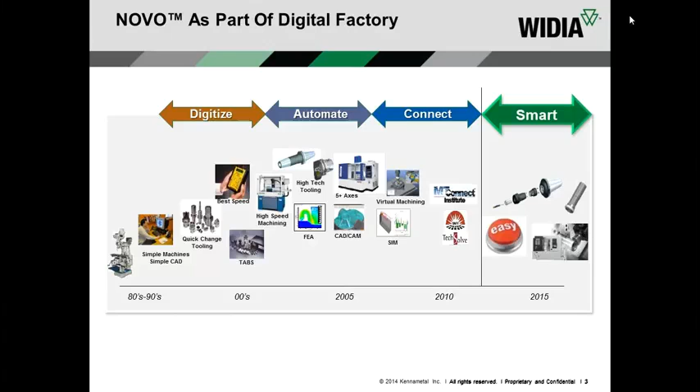So if you think about where we are today, you have a lot of complicated CAM programs, tool management systems, verification software up on the left, coming together to talk to very expensive digital machine tools, which are also being enabled by a movement called MTConnect, which will allow these machines to talk together. On the bottom left, you have a bunch of digital data around all the products and consumables we use. It's coming in through the web, coming in through the cloud.

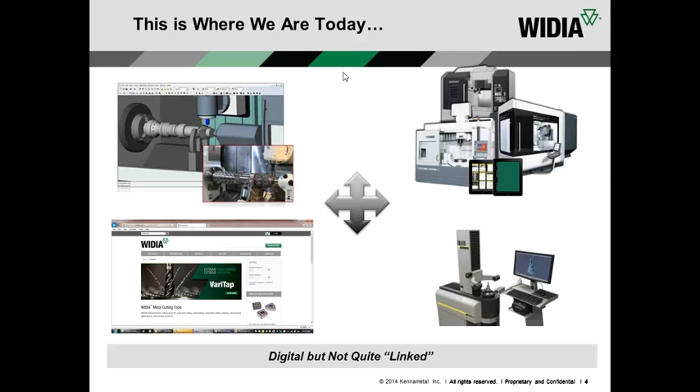And finally, on the bottom right, a bunch of other related equipment. So we have a very digital environment that we operate in, in our personal lives and in our shops, but it's not quite linked. So our vision with Novo was digitizing our knowledge and data around our products to enable productivity in what we call the other 97%. You might have heard the study.

Normal studies will say that around 3% of the standard cost of goods sold for a machined component is tooling. All of the other costs are in other areas: labor, machinery, overhead. And the opportunity by digitally connecting all this stuff is to cut down on non-value added work. So instead of optimizing a machining process spindle by spindle, feature by feature, and then going back and trying to get it back through the system, what if we brought that knowledge and data up front in a way that it could flow through the art-to-part process?

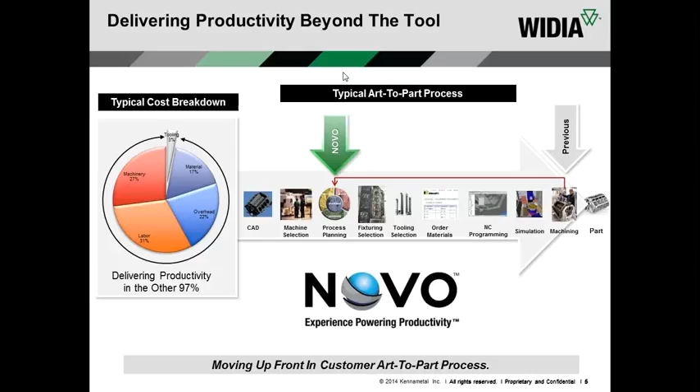Wouldn't this be much smarter? Wouldn't this eliminate a lot of non-value added work, looking through catalogs, typing data, and manipulating models? This is all really a necessary evil. And we think we're on a very positive path towards doing this. We have really been able to solve a lot of problems for people in the process planning area.

They know the CAD/CAM, they need access to our data and models, but they also need it to work very easily and very simply with the systems that they use. And all of the people around the machining operations, our distributors, our application engineers, they also are doing a lot of this process planning and collaborating.

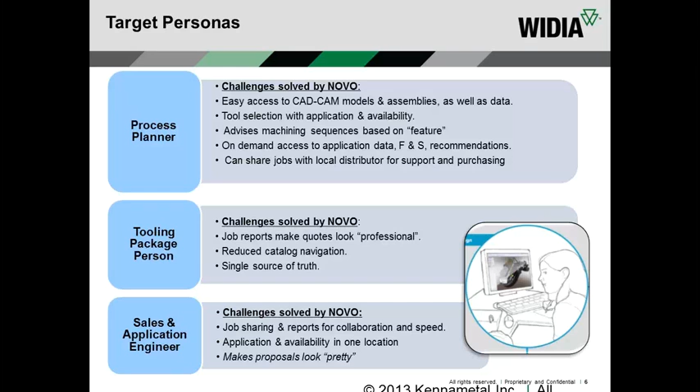The process planning is a very collaborative process in the machine shop: purchasing, production planning, CAD/CAM. So that's by bringing the data together in a way that can really be manipulated and brought in the right way to the right place at the right time to speed this process up. I can show you just one case example of what we have accomplished.

You know, the traditional way of selecting tools, our team, in fact, this is a team of process planners within WIDIA who, you know, we're basically a tooling company. They told us this is a day in our life. Someone puts this process plan in and says, hey, pick me all the tools and machining strategies to do this process. They told me that on average, this would typically take a 4-man team about 2 days to do in the past.

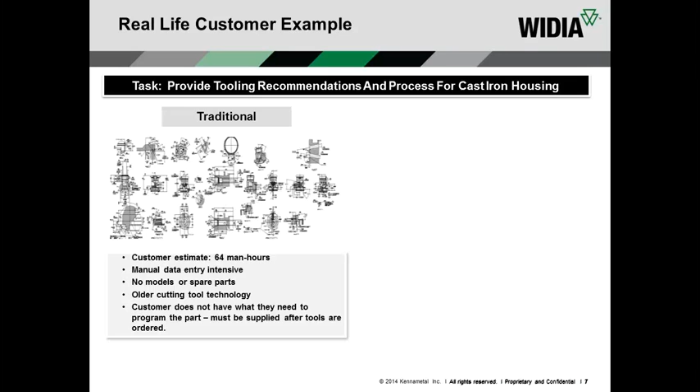You know, you got these 5,000-page catalogs. You got to look for everything that fits together. You basically got to reverse engineer the component, and in the end, you still wouldn't have all of what you need to program the part, and you'd probably use a lot of old knowledge because when you have all this data to go through, you tend to revert to what we call tribal knowledge.

With the new PC and tablet application, a 4-man team did this in an afternoon. It was 103 tooling assemblies on this particular component. They had all the optimal feed and speed information, the latest technology, because Novo is coming live from WIDIA's PLM system. So if we put a new product in today, it's in there today.

And most importantly, they had all the assemblies, all the models, and all the data ready to program their part. So this is just one example of a 75% time saving just in the area of selecting, getting the models and data, and getting prepared to program your part. So this is what the future of digital manufacturing holds.

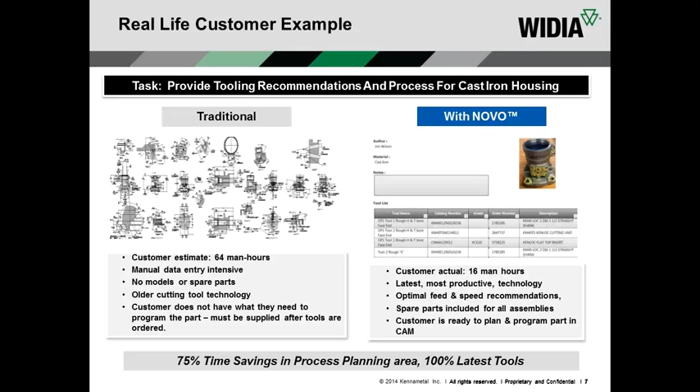So our vision really is to connect with all of these areas within the shop which required tooling, data, and knowledge. And as you can see, we've launched a free tablet and PC application, but our real vision is to get this data and knowledge into shop systems.

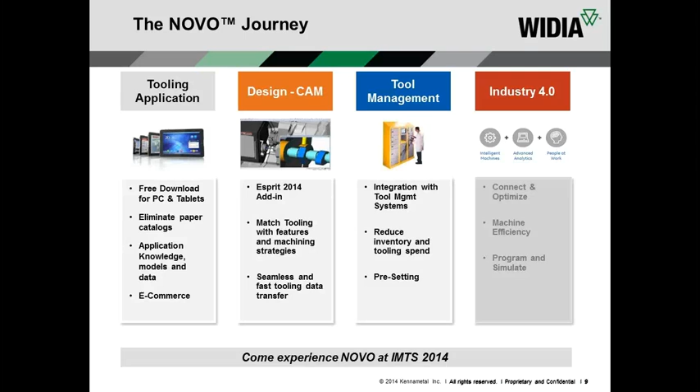And if you were at IMTS, you saw we had already integrated systems with Vericut, Esprit CAM, tooling, Zoller tool management. So really delivering the knowledge and data in the way that people want to use it in a very easy format. And our vision really is to drive all the way to Industry 4.0 for the machining processes. So I hope you enjoyed a little background on the program itself.

Sorry, it took just about 7 or 8 minutes there. What I would like to do now is go into a 10 to 15-minute demonstration of the PC and tablet application. So as you can see when you log into the PC and tablet application, it knows who I am. It knows that this is Chris Merlin.

And this is because one of the unique things about this solution is it allows you to use a free cloud account. So it's just a name and an email address, and not too intrusive. And what this really does is it gives me access to what we call job management. So people in process planning, you know, they're basically programming jobs and organizing packages of data around jobs.

And if you look here, this has got all of the jobs that I've done in the past stored in a nice, easy way. So if I create a job at home and I log in on my PC at work, I've got my data there. So it's very portable, very good for collaboration. And process planning areas are working on the same job, so they can copy a job as a template. They can share a job with their counterpart. It'll show up in their job list. So this is a really nice feature of this particular tool.

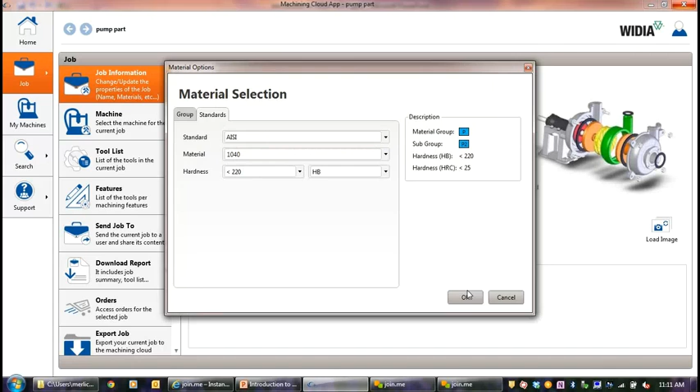So if I go into AISI, I start to type in 1040, it's going to tell you that this is under WIDIA's P2 machinability group. So already it's saving me time because as I set this at the job level, now it's going to work only within the tools which are optimal for this particular material. So now I have the material set.

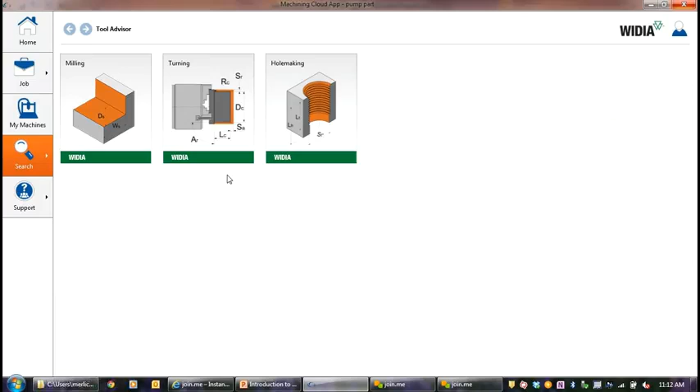I put in a little picture of my component here of what I want to machine, which is the outside housing here. I'm going to work on these holes here on the outside of the housing. So if I go into what we call a tool advisor, it's starting to look a lot like a CAD/CAM software. So I'm going to pick a hole making operation.

It's got lots of nice, easy to use templates. This happens to be a simple through hole. And you see it's got the option here for a machine. I'm going to go into that a little bit later, but you can define machines so that it would restrict some of your selections, for milling, for example, based on the capability of your machine.

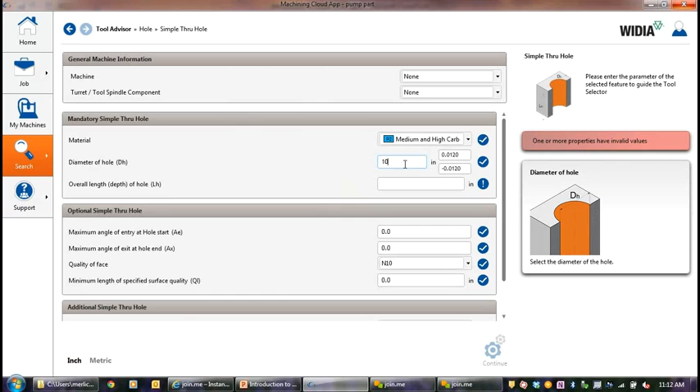In this case, I'm going to go into a hole that I have that's a 10 millimeter hole. So I can work in inch or metric. I'm going to do a 10 millimeter hole, about 50 millimeters deep, and I'm going to tell it that there's about a 60-degree angle on the face. So it's got 3 required pieces of information, one of which is already filled out at the job level, and then a lot of other optional information that I can add to refine its searching or its output.

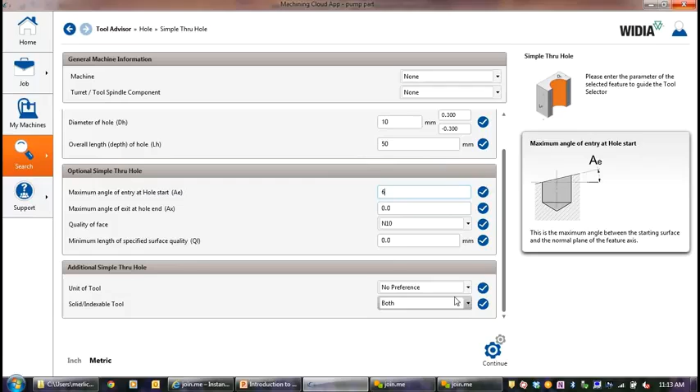So I could ask it for inch or metric tools. I can ask it for solid or indexable tools. In this case, I'm going to run it wide open and find what the best solution is. So when I hit continue here, it's cranking through. What we've done is we've matched all of WIDIA's tools to machining strategies. This is very critical because if you work in a process planning area, you go from component to feature to strategy. And your strategy is often dictated by what you're comfortable with or what works best on your machine. So we've connected all of the WIDIA tools to machining strategies.

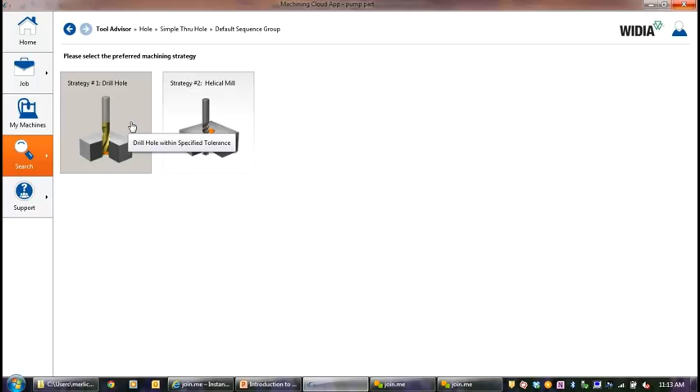So that's pretty cool. And actually, most people will drill this hole. But it did tell me that if I didn't have a drill in stock, it is possible to helical mill this hole. So it allows me to pick the strategy I'm comfortable with, and it may teach me about a strategy I haven't even thought about. I'm going to pick the traditional hole drilling strategy. And now it's cranking through 40,000 standard WIDIA tools based on the parameters I've given it to not only pick a tool, but actually a tooling sequence.

I'm not sure what happened to my tab there. As you can see here, it's found a tool, which is great for a 10 millimeter hole, and because it's 5 times D, it's picked the Top Drill S for this particular application, which is our most productive solution for steel.

Now, it also allows me to view alternate choices. If I'm not comfortable with that particular tool, I can also look for other tools that I might have in my stock. We've also got a connection to our toolbox unit, which would show tools that are in my toolbox unit. So in this case, I've found the tool that's best for me. It's this TDS 202, and now I'm going to add it to my job. Once I've added it to my job, it's saved in there, and now I can do a couple things.

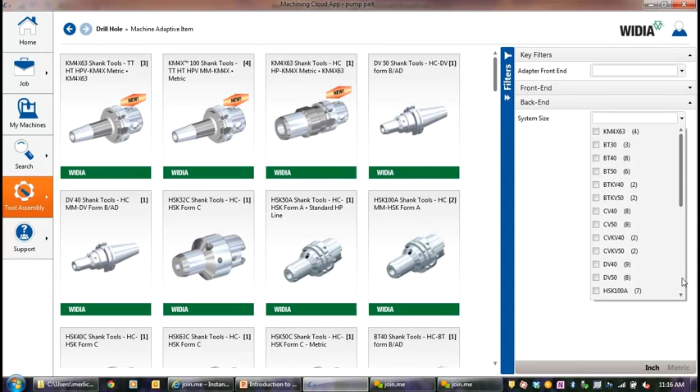It won't match a hydraulic chuck up with a Weldon shank, for example. So I'm going to pick a KM adapter here, I'm going to add it to my tool assembly. And now you're going to notice one of the most important things with Novo. So if you're in process planning or you're working with CAD/CAM, all of this is basically a necessary evil. What you really want is the models and data to program this part.

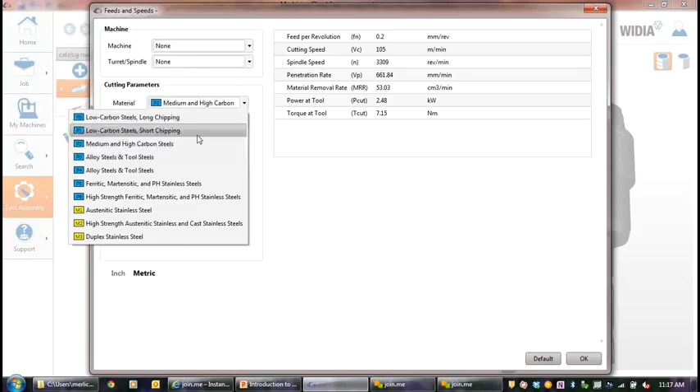So as you can see, it's building live the 3D assembly. I can download this into common file formats. Basically, STEP usually works with Vericut or most CAM systems. I can also do the light simulation model. And I can go in and check the feeds and speeds very dynamically. So if I click on here, I can change the material. I'm going to stay with P2. I can change the starting speed, the starting feed, and it's going to adjust dynamically my torque and power requirements.

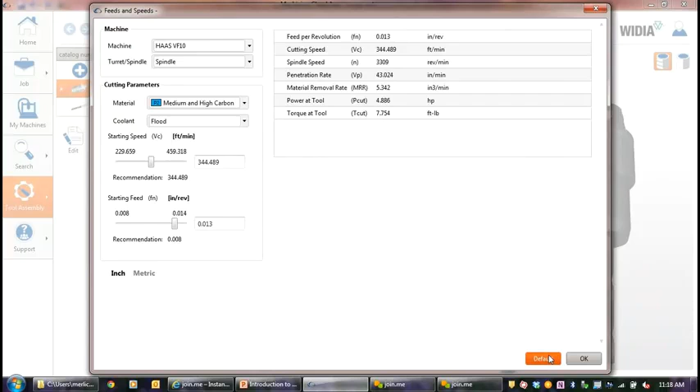So it'll also give me a warning if I've selected a machine. If I've selected a machine in here, and it happens to be a milling cutter, it'll tell me if I've exceeded the capability of that particular machine. It also has a default button. So if you get in here and play with it, you can go back. So now you can see I have my model. I have my feeds and speeds. I can download this. I'm ready to program my part.

The other thing that Novo's done, by organizing this all in a job, I don't have to download just one model at a time, which is very time consuming, or put them together. It's assembled all my models, and I can export this whole model in a format for import into these systems. So if you've ever set a tool up in Vericut or Esprit or Tool Management, you know this could take up to 2 or 3 hours to set these tool assemblies up. With Novo, I can actually, with a click of a button, send 4 or 5 tools into my system, and I'm ready to go. So that's all about how the advisor and the tools and the models work.

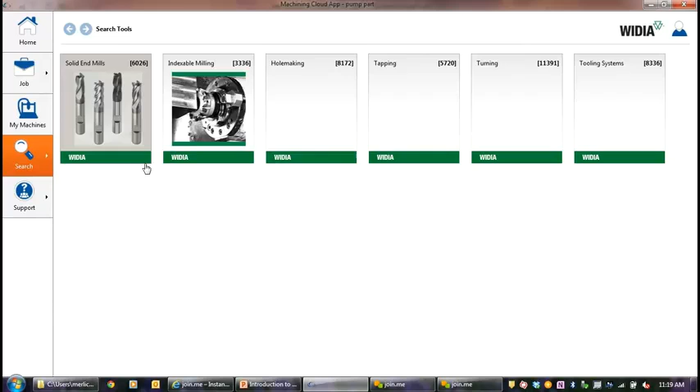I'm also going to show you our search by product family. So this particular solution is like our catalog on steroids. It's electronic. Again, I'll go into milling, for example. But what's really great about this particular solution, I'm not a milling guy. I'm an old holemaking guy. I might want to search for a mill that can do face milling, pocket milling, and helical milling. Okay, so I've done the face milling, pocket milling, and helical milling, and now I'm going to go into a diameter of, let's say, 1 inch cutter here.

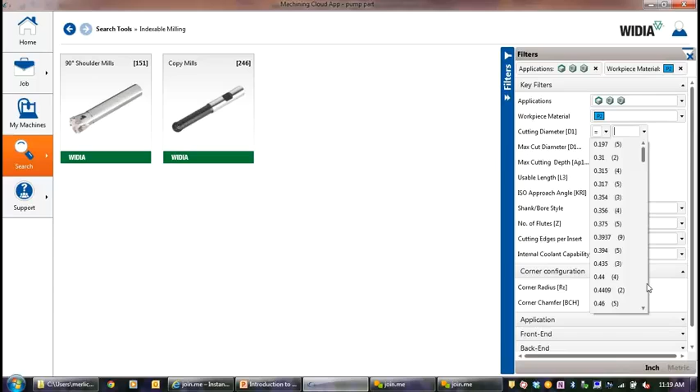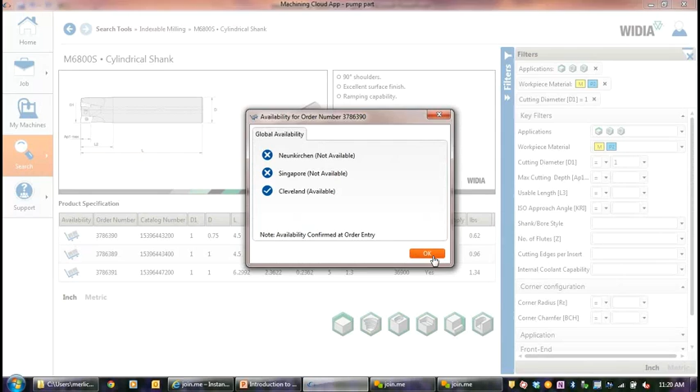So now with just 3 clicks, I've basically found all of the milling cutters within the WIDIA portfolio which will work for this application in P2. I can also say, you know what, I know I want it to work in steel, but I want to make sure it works in stainless steel as well. So now I've clicked in there. I can go in and I can actually check availability. Maybe I need this tool tomorrow. So I can click on availability here and see if it's in stock in Cleveland, perhaps. So this one's available. Great. I'm gonna order this one here through my local distributor, and I'm gonna add it to my job.

So once I've added it to my job, now that I've checked that it's available, it's very easy for me to find the inserts and match the inserts to this particular milling cutter. So as you know, we have a 2,000 page catalog, but I've basically got 25 inserts that'll work for me. And once I get into maybe a corner radius here, I'm basically down to 4 inserts.

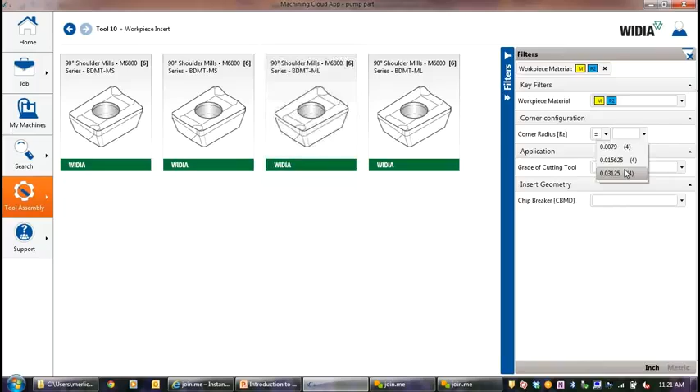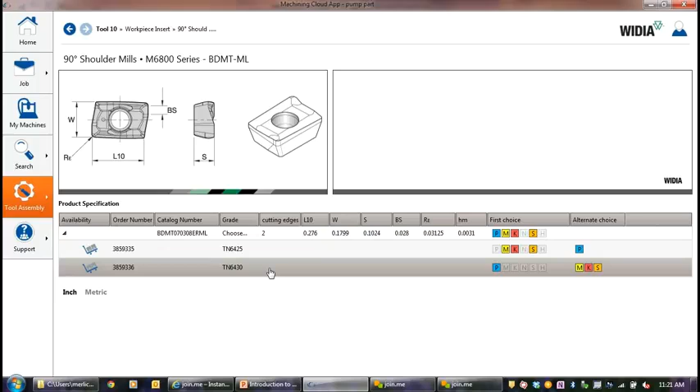So it's very easy for me to check which insert might be in stock. I can also go in and it shows for the inserts if the particular insert's a first choice or an alternate choice for a particular material. So I like this insert here. It's a first choice for steel, it's an alternate choice for stainless. So I'm going to pick that one. I know I have a steel job, but I just want to make sure it works in stainless. I'm going to pick it, add it to my assembly, add it to my job, and now I'm ready to go.

The other things that you can do in here as an end customer, which are very convenient, is you can add these tools to your shopping cart. And once I've got my shopping cart built, I can request a quote from my local distributor, enter his email in here, and my local distributor rep's going to get a list of my tools. If I'm a WIDIA distributor, once I've got this job, I can actually enter my WIDIA Center account and check my pricing, order. I can even request an SAP quote from WIDIA directly.

Two last things I want to show you guys. The first is the machines concept. So again, I've set up this Haas machine here. It's very simple to set up. You have a name, a cost, and a machine efficiency, and then the important thing is to set up the spindle. So this particular spindle, I've got 25 horsepower, maximum torque of 600.

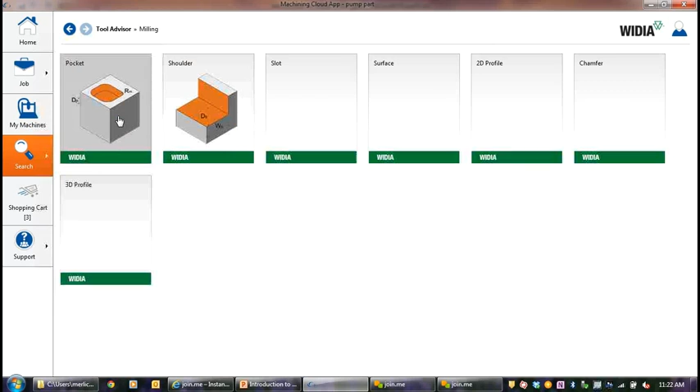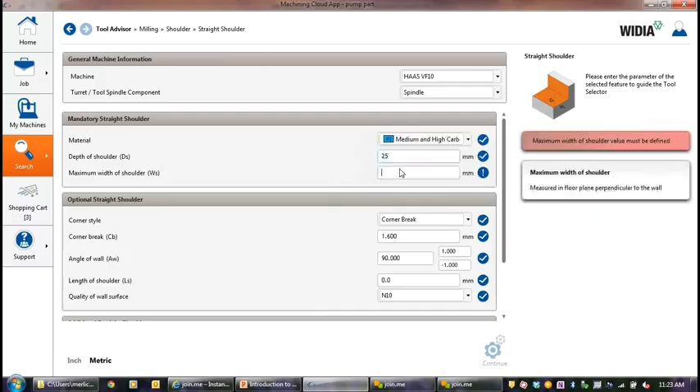The last thing I wanted to share with you today is just the quick search method. So it does have a very nice Boolean search. I can search by product family or material master number, and this is a very nice way to check inventory availability, feeds and speeds. If you have a particular material master, it's pretty easy to check here as well.

So I'm going to open it up for questions. And I would encourage you to ask away.

So the first question that comes to my mind is if you look at the tool advisor and come over to turning. Yes. Now I see that quite a few of the operations are not even active. Yeah, so those are in development and will come in later releases. We have a pretty robust solution on the market. We have about 30 standard applications, 40,000 standard items, and 3,000 materials, but we're working on the threading, grooving, and cutoff as we speak. Well, okay, there's actually cutoff in here. I guess it's just threading and face grooving, huh? Mm-hmm. So good question.

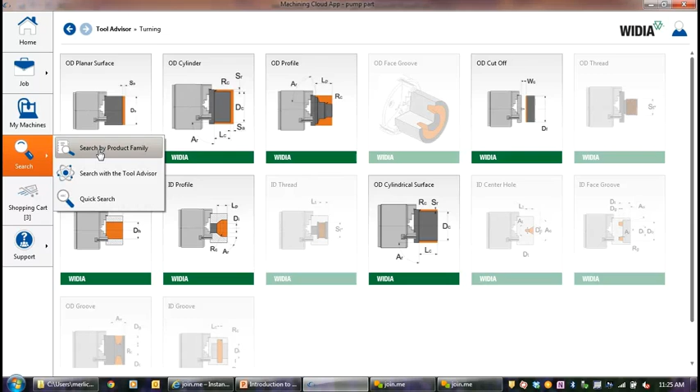Can you also tell me once again where are the catalogs? Yeah. So if you go to search by product family, you basically have the catalog here. You can see the major sections. Okay. So does it have all the catalogs for sure? For sure. Yeah, 40,000 items. Okay. And does it also have all the products in the Novo already built in, except those threadings and cutoffs? Actually, the products are in there.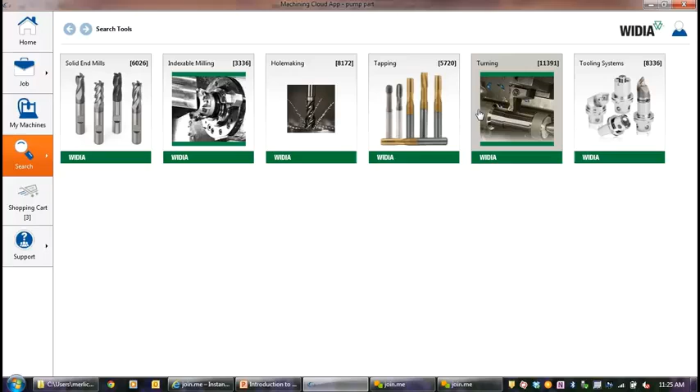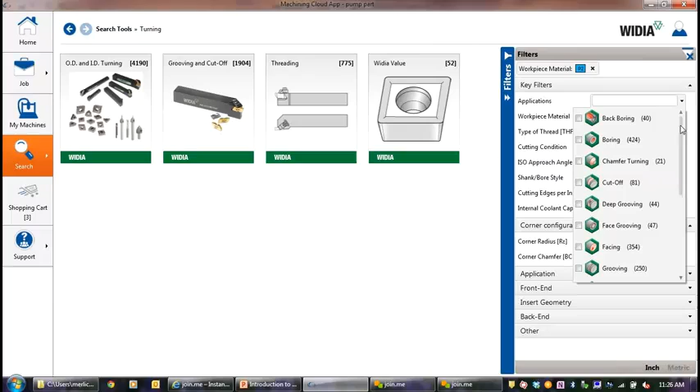So if I would go into threading, for example, it's just not the advisor. So if you go into turning and you wanted to do a face grooving example or threading, you actually have a threading section in the filters. It's just not the advisor. So you can use this for solutions for that.

Okay, great. So do we conclude that if something is not popping up on Novo, it does not exist in the product range of WIDIA? Yes. So what's great is because it comes live from Kennametal's SAP system or from WIDIA's SAP system via the cloud, if we obsolete something, it will disappear out of here. If you also save a job and the item goes obsolete, it'll give you a warning like your Apple phone. So you can conclude if it's not in here, it's not an active item.

And the same is true for new items. We have the VSM 11 in here, which won't be in a catalog for 4 or 5 months, but it's in here. Okay. Yeah, sounds good. Pretty clear. Yeah, you're welcome. They're good questions. We have the latest view of the portfolio here.

I've got a question. Vericut on a standalone system. Can I export this stuff out of your system so that I can upload it into a standalone computer system? Not sure if I understand your question. Do you want to export the data, or do you want to run it offline? I want to export the data so that I can import it into Vericut, which is on a standalone computer system.

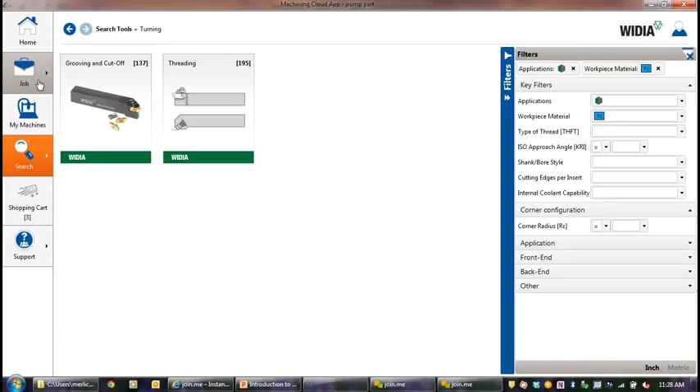Yeah, absolutely. So for Vericut, you might have missed it, but at the job level, I can export the whole job of tools I've created to the format which Vericut likes. So you'll get all these tools, all these models, and it'll just download to your desktop, and then you just upload that to Vericut. Vericut has developed an easy button inside their app as well. I'm not sure what stage it's at, but they're going to have a button that you can just share a job. So I could share a job with Vericut, and you can suck it in as well. Did that answer your question?

Yes, it did. By the way, you can also download the individual items as well. So when I was in this item here, for example, there's a download model button. I'm like jammed up here. So there's a download model button which will also allow you to download this particular item into a file format as well. So you can download an individual tool, an individual assembly, or a job full of assemblies with an automatic export to Vericut.

All right, thank you. You're welcome. I hope that saves you some time, huh? That's always an issue getting models into Vericut, isn't it? Yes.

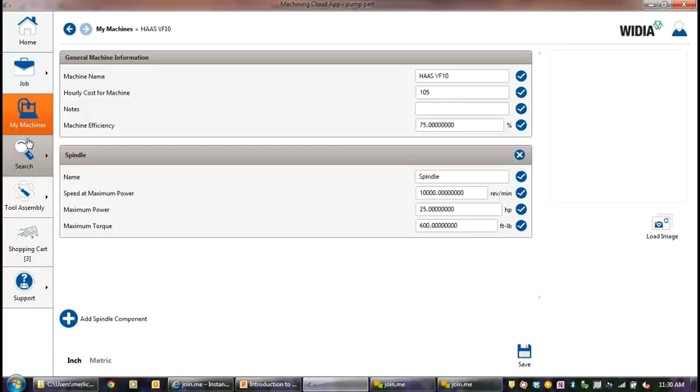I should mention, in the future, we've partnered with the Machining Cloud, so they have a lot of people you can see who are working with them. Their vision is to have machine tools publish their machines to this application. You can just download it. And then at that point, it would know what kind of machine it was. I'm not sure it's coming tomorrow, but we recognize the need. Right, but that's in the plans later on down the road. Okay. Well, I'd say that's their vision. I don't know if they have a plan. Okay. Good question, Tom.

Anything else? Anybody else? It seems simple enough to get started with. The other thing I probably didn't show you guys out there was, under the user profile, you can eventually hook this into a toolbox system, and it would also show in your tab not only availability at the warehouses, but in your toolbox.